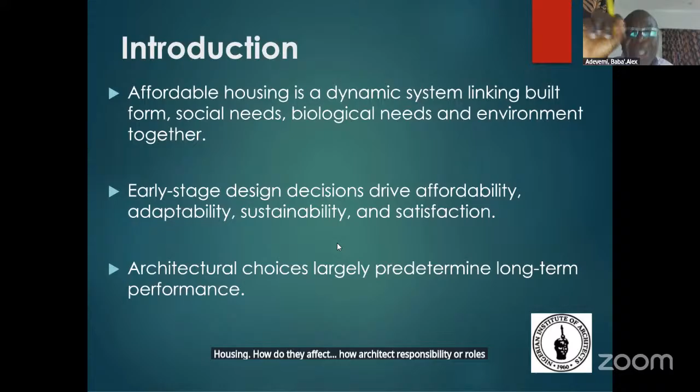The topic today is the architect's role in shaping affordable housing and a critical examination of design principle and practice. From this topic, we can pick two major variables: architect and affordable housing. We are looking at the connectivity between architects and affordable housing, and how architects' responsibility or roles shape affordable housing. That's what we are looking at today.

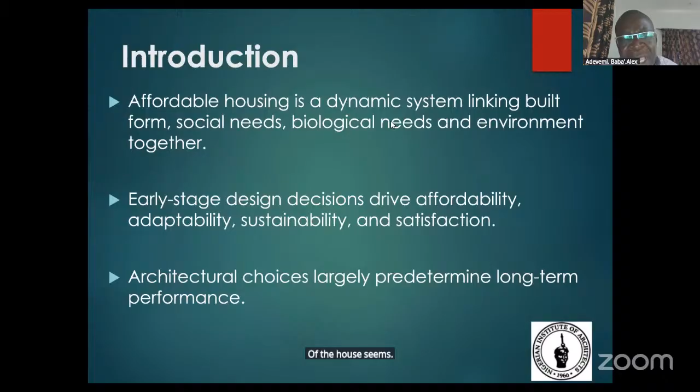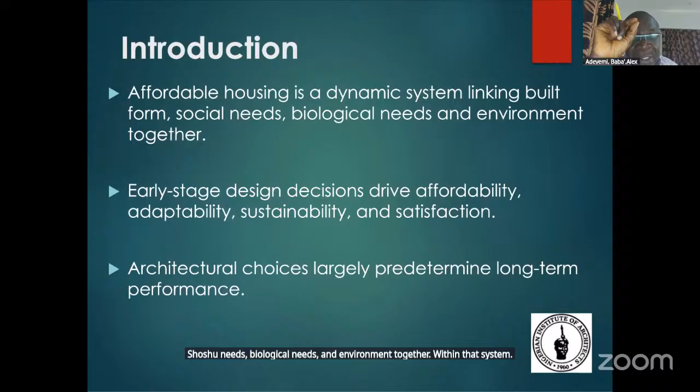Affordable housing comprises residential buildings, non-residential buildings, public domain, and the moderator factors, which are the users of the housing. From there, we can quickly agree that affordable housing is far more than a low-cost commodity, but a dynamic system linking building form, social needs, biological needs, and environment together. Within that system, the architect's early-stage design choices and decisions largely determine the long-term affordability, sustainability, functionality, and even the satisfaction of end users.

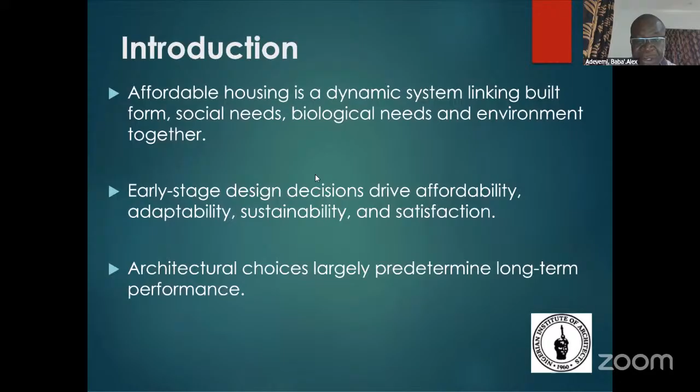Why do architect roles matter to shaping affordable housing? Architects, by nature, are proactive more than reactive. We predict the future from the start of a design. So we can look into the future and face the critical shortage of decent affordable housing in urban settlements. When design variables are poorly aligned to users' demographic or to local climatic and economic reality, the downstream effects are tangible - causing overcrowding, escalating maintenance costs, and even reduced quality of life. In essence, the performance of affordable housing is a direct expression of architectural decision-making.

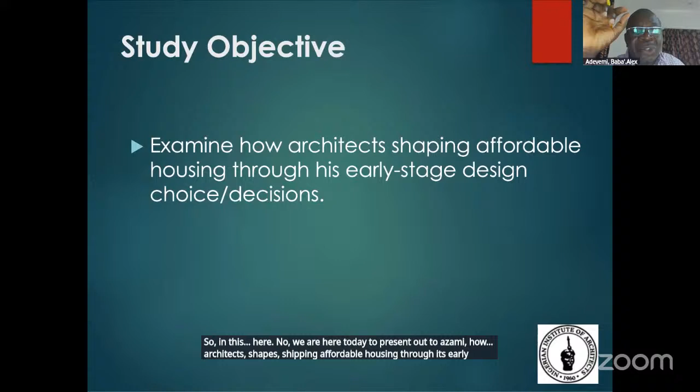Now we are here today to examine how architects shape affordable housing through early design stage choices and decisions. The earlier stage design tools used are design variables, housing components, and the opportunity and choices offered by the design. Those are the tools that architects use at the early design stage.

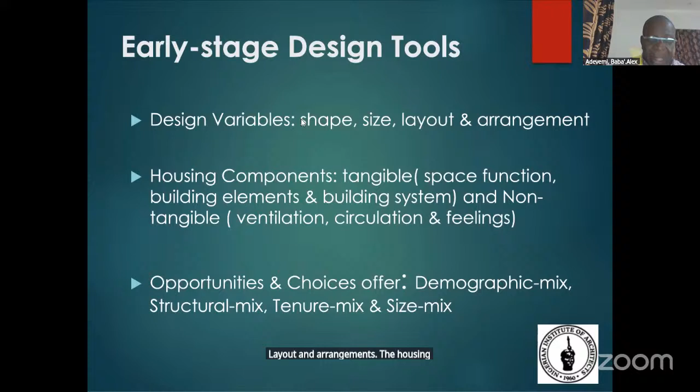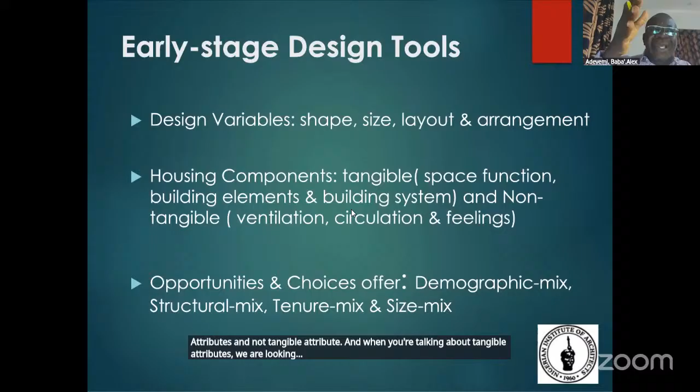Design variables are geometric shapes, size, layout, and arrangement. Housing components can be looked at from two perspectives: tangible and non-tangible attributes. Tangible attributes are the physical features of the housing component - let's look at space functionality. For example, the living room takes care of social bonding, the bedroom takes care of sleeping, the kitchen of cooking, and the lobby takes care of circulation.

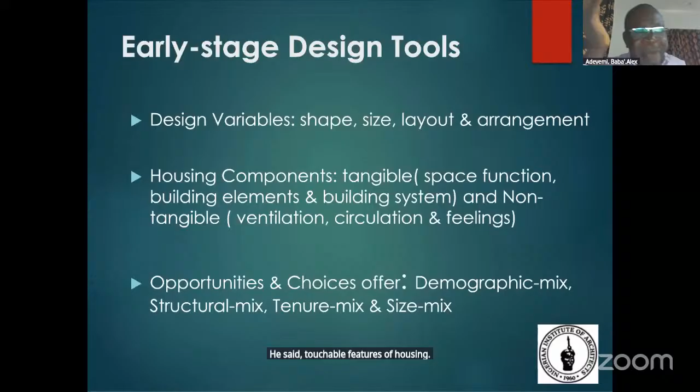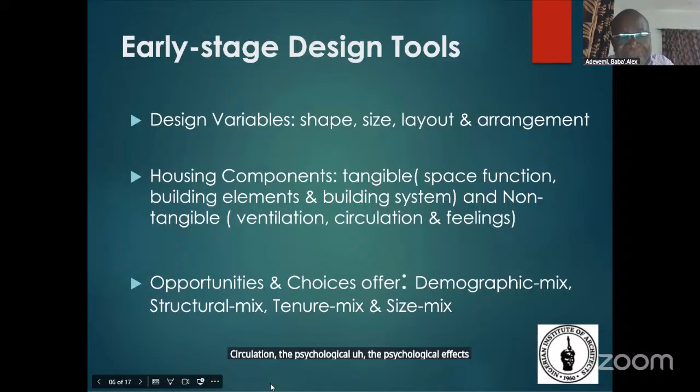The building system and building elements are also tangible features of housing components, like the floor, the wall, ceiling, roofing, and so on. Those are elements to consider at the early stage of design. Also, the non-tangible aspects of housing components are ventilation, circulation, and the psychological effects of the design. Those are the non-tangible features of housing components.

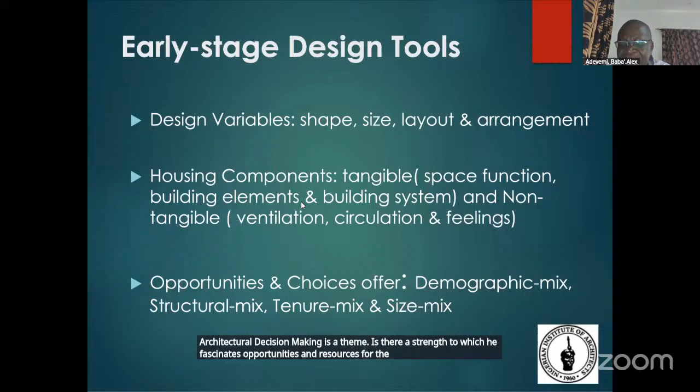And also the housing opportunity and choices offered. Architectural decision-making is the extent to which it facilitates opportunities and choices for end users. This can reflect in the ability of housing units to accommodate demographic mix, tenure mix, and size mix. When talking of tenure mix, for instance, it accommodates owners and renters - gone are the days, but now we are doing rent and hold. That is tenure mix.

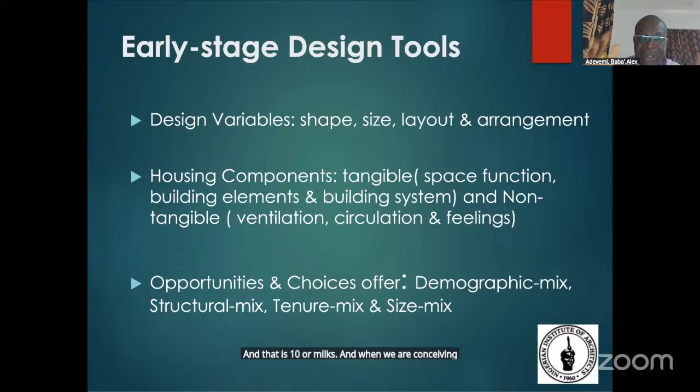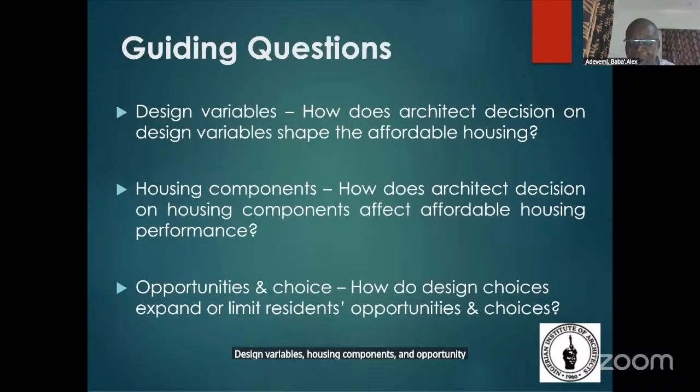When we are conceiving affordable housing, we have to think in line with all three components: design variables, housing components, and opportunity and choice offered by the buildings. So can we move to the next stage?

Based on these three variables, the guiding question will be this: how does architect decision on design variables shape affordable housing? How does the architect decision on housing components affect affordable housing performance? And how do design choices or decisions expand or limit resident opportunity and choices? Those are the questions that guide us based on the early design tools we are using.

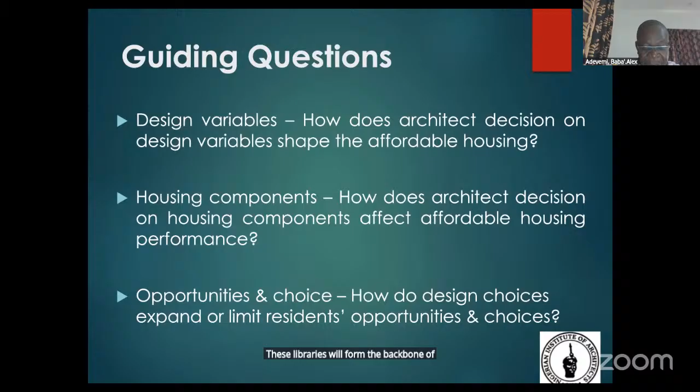Now let's look at the architect's decision on design variables. Design variables form the backbone of architectural decision-making and significantly shape the cost effectiveness, usability, and longevity of affordable housing. These variables comprise geometric shapes, layout configuration, and others. The architect's manipulation of these spatial form elements has a direct relationship with both the initial cost and performance of affordable housing. The architect's decision lies in the ability, manipulation of imagination, and creativity to put all these things together to design affordable housing.

Let's also look at the architect's decision on housing components. Housing components, as I've said, refer to tangible and non-tangible aspects, but effective integration of these elements supports sustainability and functionality and reduces the life cycle cost while ensuring comfort and user satisfaction.

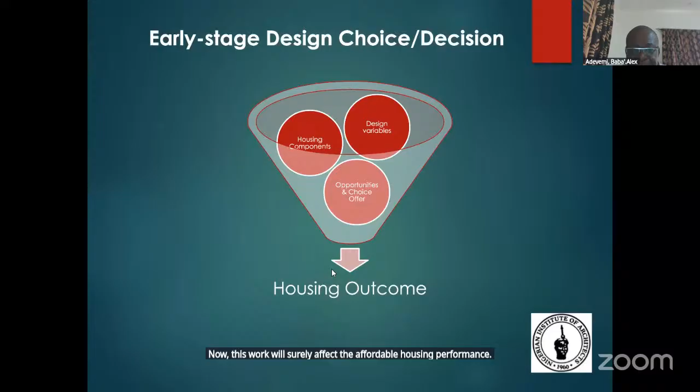Now let's go to the implications of early design stage choices and decisions. When you take your design variables, the shapes, the size, layout arrangements, and others, and apply them to your housing components.

Your housing components, in terms of tangible and not tangible that we have looked at, and in terms of the building space, the building elements, and the building systems that you apply - all those will determine the opportunities and choices you are offering the end users. This eventually affects housing performance in terms of affordability, adaptability, and sustainability.

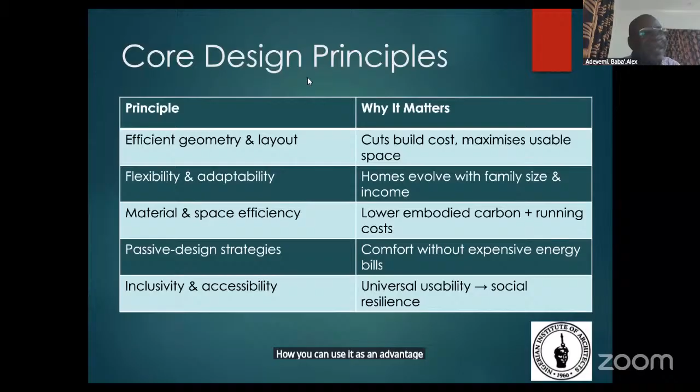Also look at incorporating passive design strategies into it. Let's do more of natural means than artificial means. Now we can take our daylight and use it as an advantage, and even the flow of air, the air circulation within the building.

Let's also look at the principle that will encourage inclusivity and accessibility into the design.

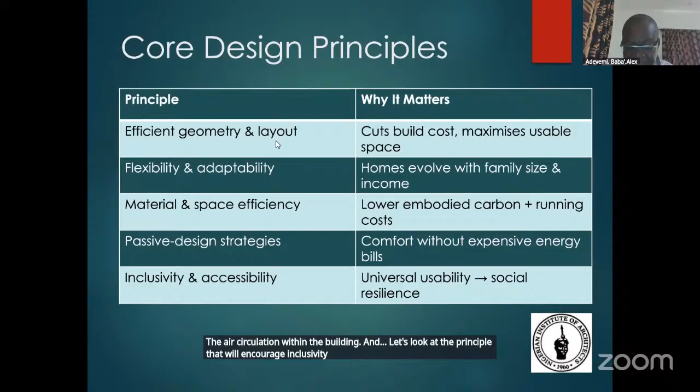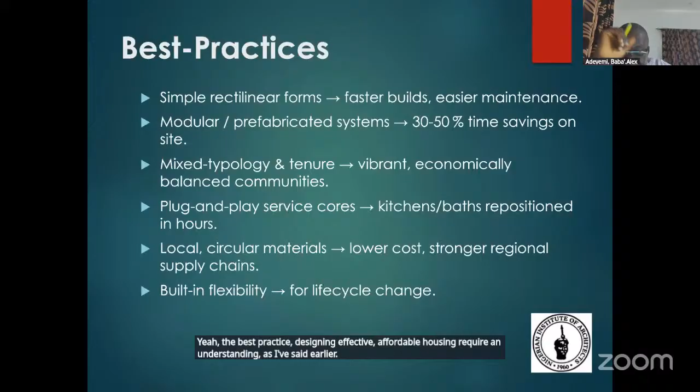Now, best practices. Designing effective, affordable housing requires understanding, as I've said earlier. To effectively implement core design principles in affordable housing design, architects must adopt practical and scalable strategies that address both construction effectiveness and long-term possibilities for the design.

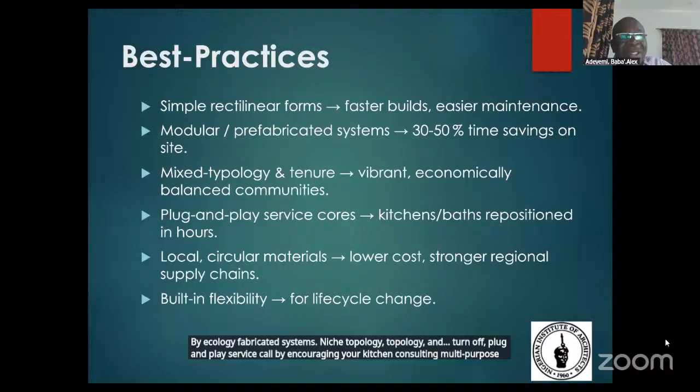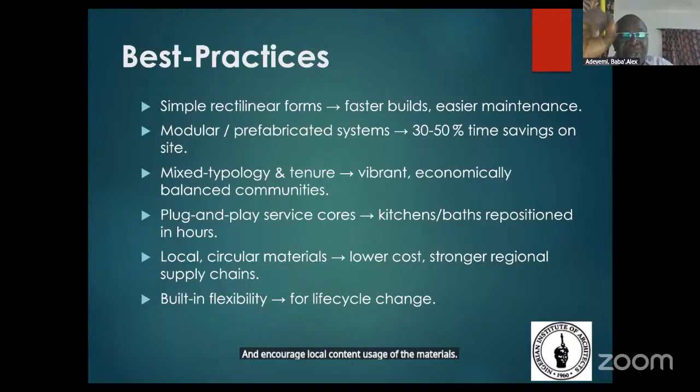The following best practices provide actionable guidance for achieving high performance, user-centred housing design, such as encouraging the use of simple, regular forms, fabricated systems, mixed typology and tenure, and plug-and-play service cores. Encourage your kitchen to serve multiple purposes - for cooking and also for storage. Encourage local content usage of materials and build in flexibility characteristics to accommodate the dynamic changes of the end users.

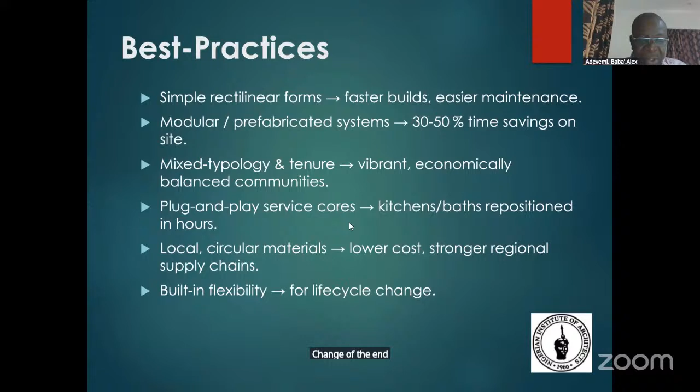Sorry, can we move forward, sir? The challenges that we see.

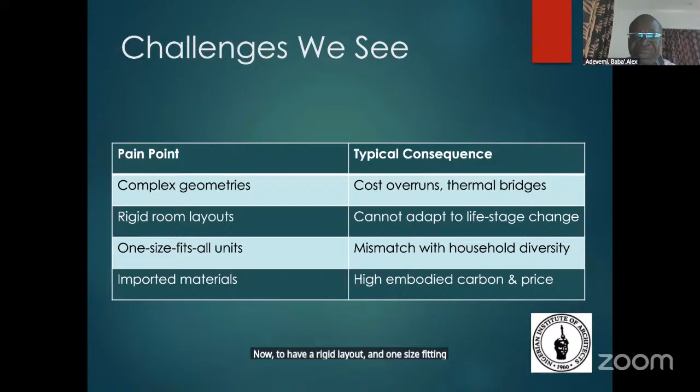As architects, our product depends on how we manage or manipulate our creativity and imaginations. When designing affordable housing, we have to move away from complex geometries, as it will add to the cost of the building and eventually affect affordability. The building and rooms don't have to have a rigid layout and one-size-fits-all units. We should also discourage the use of imported materials, as they can encourage high costs.

The opportunity, as I've said, is that as an architect, your ability is to manage your creativity through the use of creative variables - the geometric shapes you use, the sizes, and even the materials you recommend for the design. From there, all of this combined with incorporating passive design into it.

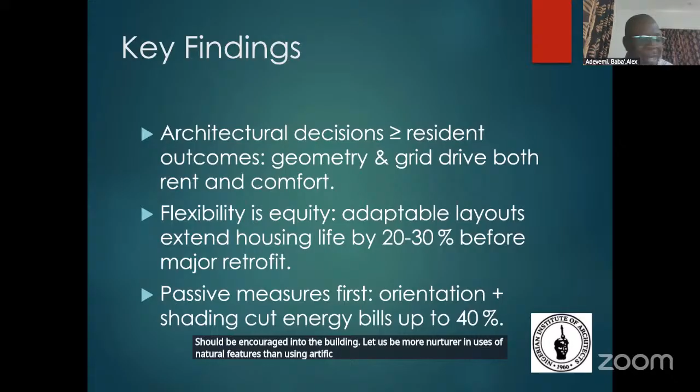We have to ensure that 20 to 30% of flexibility characteristics should be incorporated into your design. That will discourage the percentage we are using in maintaining the life cycle of the buildings. Also, passive measures should be encouraged into the building first. Let us be more natural in the use of natural features than using artificial means, like electricity. We can do more on daylight incorporation into buildings, and even ventilation, and equally the issue of...

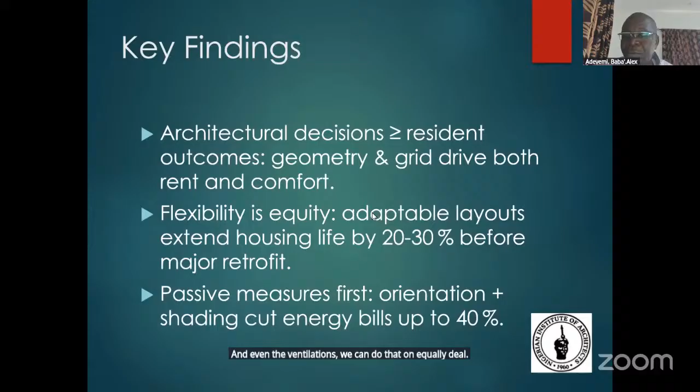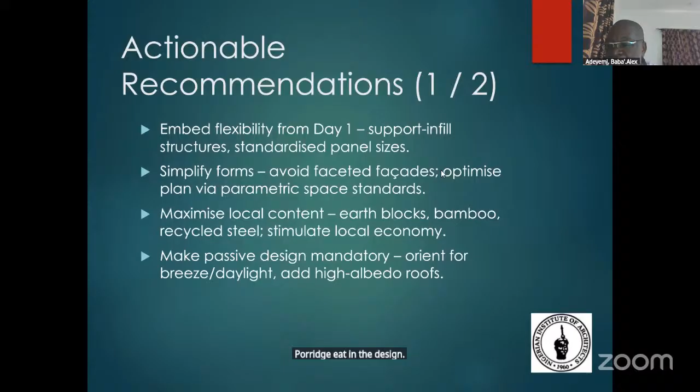Actionable recommendations: from day one, an architect should be thinking how he can inculcate flexibility characteristics into his design, use simple forms, and think how he can maximize local content, as well as make use of passive design. He should encourage this in the design, and also look at how it can foster mixed community, institutionalize universal design, leverage industrialized construction, and create post-occupancy feedback to the design, so he will know how to improve on what he has done.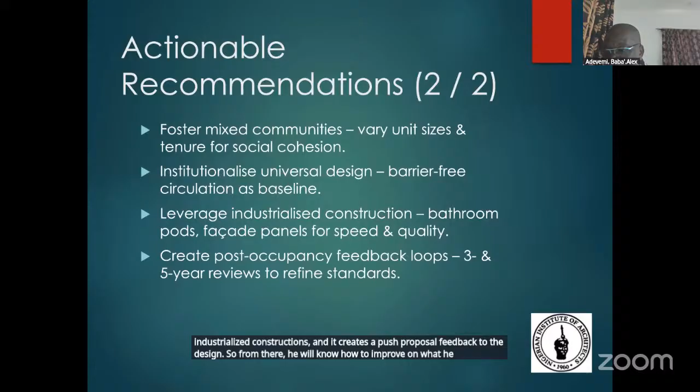Closing thoughts: affordable housing performs at the levels of architects' imaginations and decisions, when that imagination is grounded in evidence, equity, and local content. Thank you for listening.